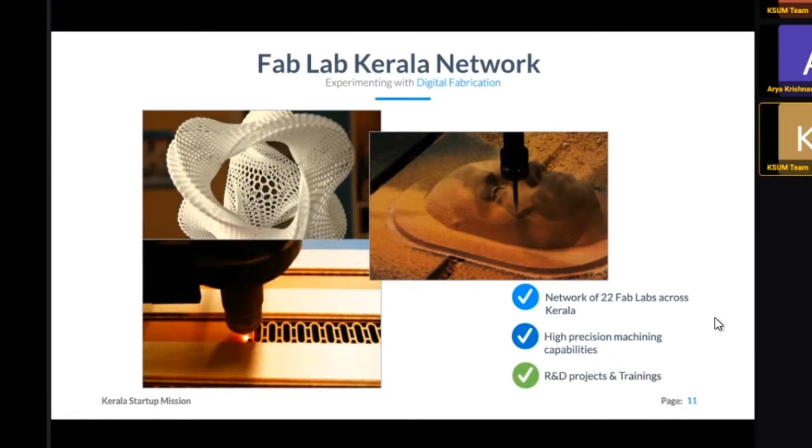Then we have a program called Future Technologies Lab. This is one of our initiatives where we are experimenting with emerging technologies. Nowadays the future technologies are like AR and VR, augmented reality and virtual reality. In this COVID scenario, we are introducing this virtual reality tool, showing a 360-degree video of the integrated startup complex and how it's working. Then there's ML, machine learning, and AI. For all future-related things, we are supporting those who are into the future technology area.

We are giving technology support and mentoring for startups. Mentoring is one of the key areas any startup needs. So we are creating a holistic AR VR ecosystem in Kerala.

In ISC we have different centers of excellence. Unity Technologies is one of the world's largest game developing companies. In association with Unity, we are conducting a different accelerator program as part of the Future Technologies Lab. Basically, we are giving access to cutting-edge gadgets, software, different AR or VR software, and different machines for testing related to startups, along with training and mentoring programs from industry experts, mostly from Unity and other industries such as TCS Innovation Lab. We are giving this kind of expert talks and mentoring for these startups.

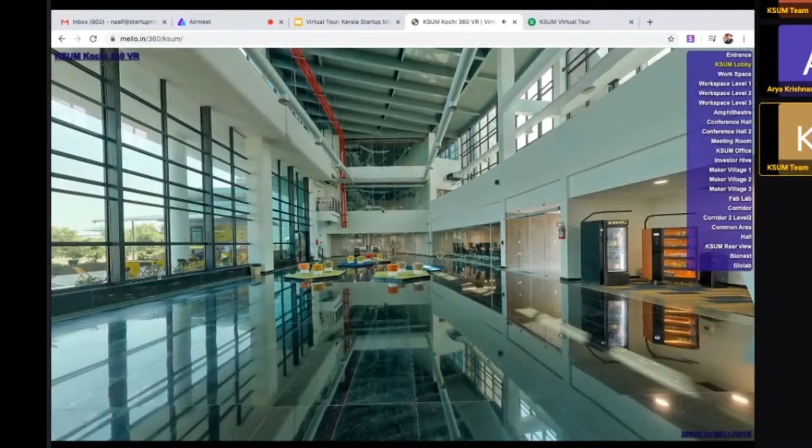You can see I am going to the lobby - so this is the main lobby, you can see the infrastructure and all. I'll go through a quick walkthrough. Once you enter the Integrated Startup Complex, we first enter this main lobby. This main lobby has a reception desk. You can enter if you are coming as a visitor.

These are the different conference rooms and all. So then from the lobby we are entering - there are 8 floors in this building. We are entering the workspace. This is a workspace where our office is located. Then we have different workspaces - our startups are working in this co-working space.

We have a telephone booth and small conference rooms. When startups want to discuss with their team members, they can use this facility. This is the co-working space where our startups work - the plug and play office space. They can use 24-hour internet facility - everything includes internet, electricity, housekeeping, security, every facility.

This is workspace level 1, this is workspace level 2. We have different sectors like closed space, open space, co-working space. This is the closed space - one of our companies called Riafy Technologies is operating in this closed space.

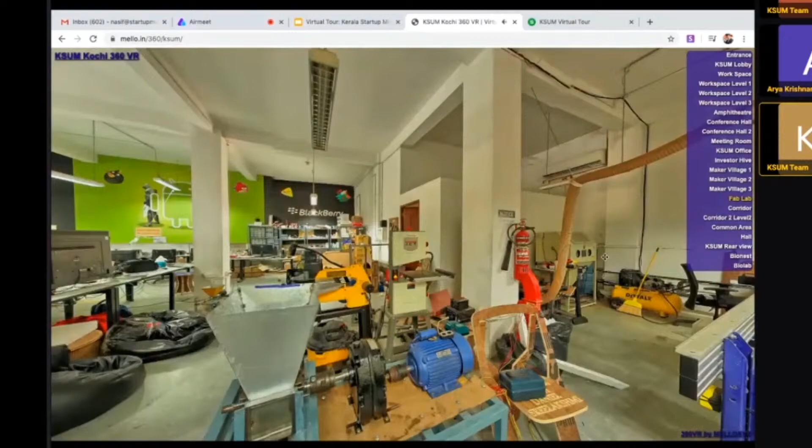This is Fab Lab, an old Fab Lab. Right now we launched the Super Fab Lab facility. Basically, Fab Lab is the digital fabrication lab for creating prototypes. This is one of the oldest CNC prototype machines. This video we shot 3-4 months back.

3 months back, we launched the Super Fab Lab facility in ISC. You can see the advanced machines, zoomed in. This is some of the oldest machines.

These are the furnitures we created from the Super Fab Lab facility. You can see the Super Fab Lab facility once you are coming. I'll add that to this video next time.

Then we have the corridor. This is like our freelancers' corner. Even freelancers can come and work here. We have a premium co-working space.

These are the facilities where people have one-to-one meetings. And in this corridor, this is the corridor level 2.

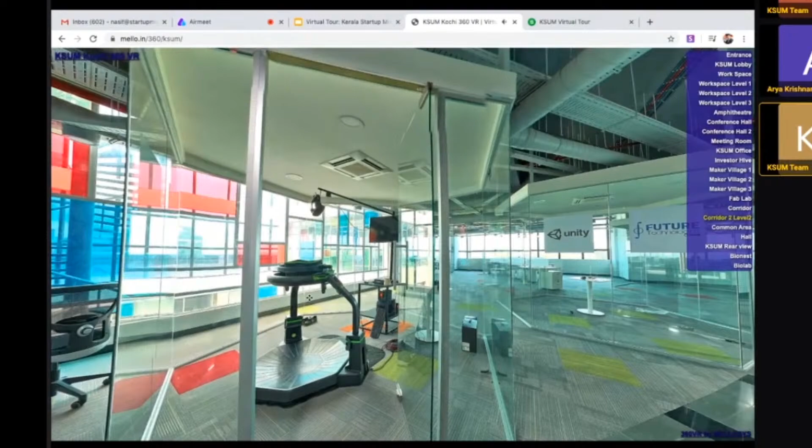We have a future technologies lab, like Unity, everything - startups into AR VR can use this facility, they can avail the space and all. This space is for a scale of startups. This is a closed space.

Then we have a common area. Even this is like a Copa Cafe model, you know, in Silicon Valley, like small cafes. When startups, founders, and investors want to discuss something new, this is what we built for discussing startup related things. People are working here.

Then we have a different hall. We are creating a live-work-play model. Startups can play table tennis and different indoor games in this hub after they're finishing their work.

Goes to the lobby, and this is the rear view. You came to the front, and this is the rear view of this building. There is a cafeteria here, then a food court in the basement floor.

This is the rear view of the integrated startup complex. You can see the greenery there, fully located in a greenery area next to the Kalamassery Medical College, Kochi. This is the main view of this building.

And we have one more incubator also going to launch, called BRIC, India's first cancer incubator. It's going to launch in the next 1 or 2 months. That also is located in this integrated startup complex.

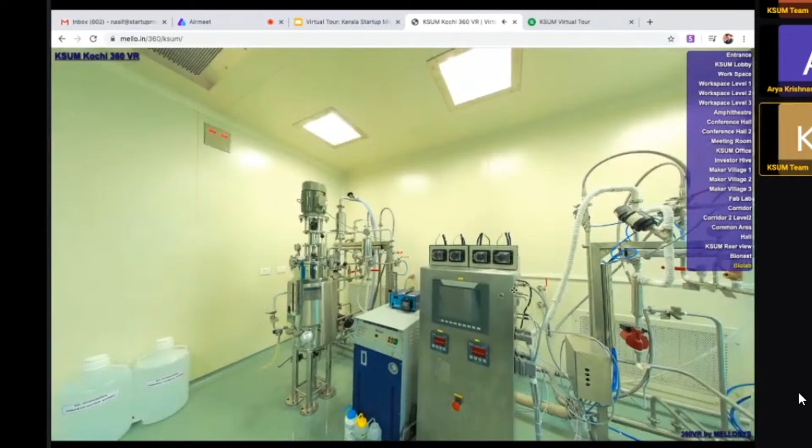This is the fully... you can see there are different bio labs in Bionest, fermentation labs, testing facilities. These are the advanced machines for scientific medtech. This kind of lab is in different rooms. I just got the one image.

Okay, this is all about it.

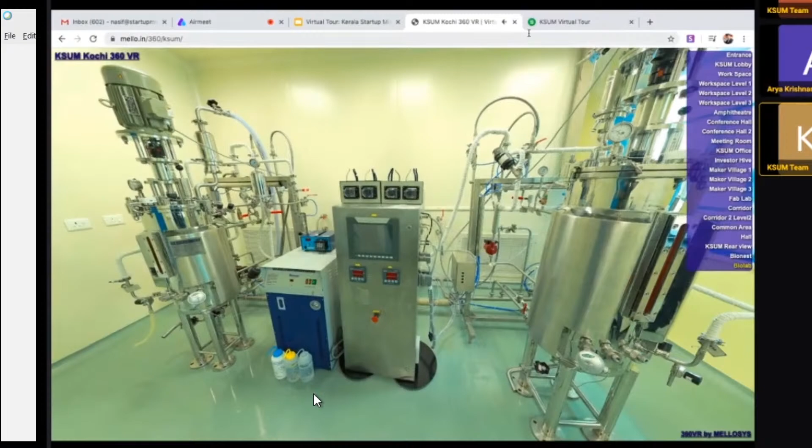Sir? Sir, are you here? Yes, can you hear me? Yes, it's audible. Sir, can you share your screen? Yes. It's good.

Although we can start, right? Yes, after... yes, the conclusion, right? Yeah, right, okay, after the conclusion. And a small info about, sir. Yes.

Niveda, you can conclude. Okay.

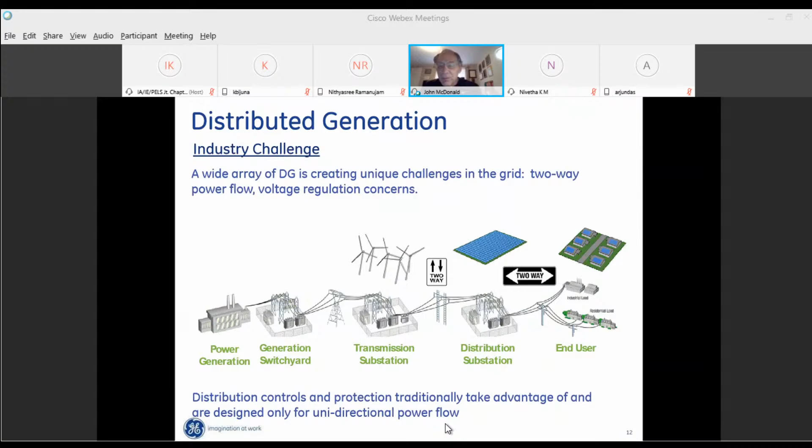The distribution part of the grid, when we initially designed it, we assumed electricity would only flow in one direction, from the source down to the load, okay? But when we integrate distributed generation into the distribution part of the grid, it causes electricity to flow in two directions: from the distributed generator upstream, and from the source to the load. So it gives us a lot of challenges, two-way electricity flow, which we didn't initially design for, and some other issues we'll talk about, okay? Now we can integrate distributed generation into the transmission part of the grid, the distribution part of the grid, or at the customer's home, by putting photovoltaic panels on the rooftop. What we'll talk about now is the distribution part of the grid and the end user.

Some of the challenges we face are open circuit over voltage due to unintentional islanding. A microgrid could be operating connected to the grid, but if something happens to the main grid, we want the microgrid to continue to operate, so it may island itself, disconnect itself from the main grid. If it's unintentional, if we didn't plan for it and it islands itself, we may have an open circuit over voltage condition. Also, protection ratings of the protective relays may not match fault currents, because now we have a component to the fault from the distributed generation. The problem too is that fault currents due to distributed generation vary. The sun doesn't shine the same all the time and the wind doesn't blow the same, so there's intermittency with renewable generation, which causes the output to vary, right? So a lot of challenges.

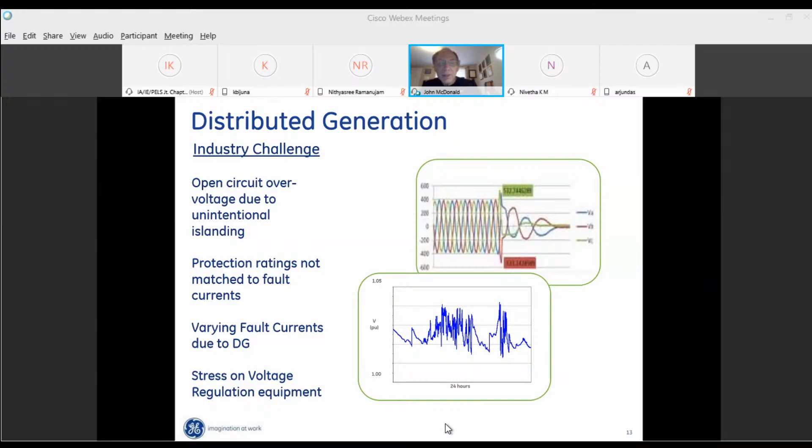So we wanted to minimize the diesel generation and maximize the use of these distributed resources. So we added logic to a microprocessor-based relay to make that a microgrid controller. The objective was to satisfy the load continuously and to minimize the use of diesel while maximizing the use of distributed generation, okay?

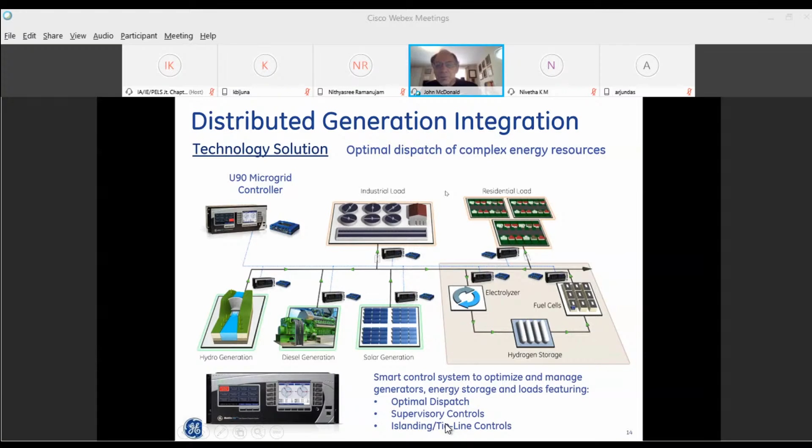Now, one of the challenges with distributed generation is the intermittency, right? The load needs to be satisfied all the time. How do we satisfy the load when the sun isn't shining on the photovoltaic panels? Well, we can use batteries, right? Energy storage, that's instantaneous. Or we can use what we call fast start, fast responding thermal generation.

Typically this generation uses natural gas as its fuel because it's lower cost and has lower emissions. So we have new technology today, which is fast start, fast responding natural gas turbine generators. And then we have pre-packaging of, say, lithium ion batteries to help with instantaneous needs or system frequency to deal with the intermittency. So we have new technology solutions today, both with energy storage and with natural gas-fired turbine generation to help meet the intermittency of the renewables.

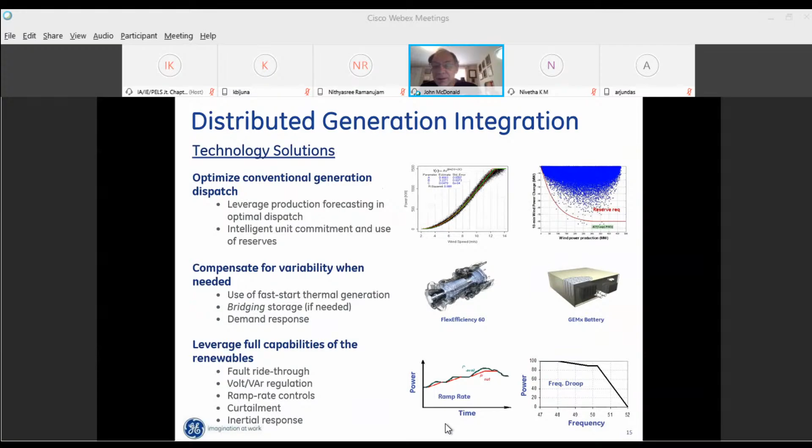Now, this is a special article I wrote in 2013, almost 7 years ago, in Power Electronics magazine, about new applications of power electronics. These new applications were driven by the impact of the high penetration of rooftop solar photovoltaic panels on the distribution system. I used a specific example from a utility in California, San Diego Gas and Electric. They had one distribution feeder where over 35% of the homes have rooftop solar panels. That's a very high penetration.

What happens is in the morning, these homes were on the Pacific Ocean, and there was a marine layer of fog caused by the humidity of the ocean that blocked the sun from seeing the photovoltaic panels on the roof of the homes. When that fog burned off later in the morning, all of a sudden all of these homes began generating electricity instantaneously. The voltage on the feeder spiked. It had a step function increase and then spiked and then oscillated. Sometimes the clouds would be between the sun and the rooftop solar panels.

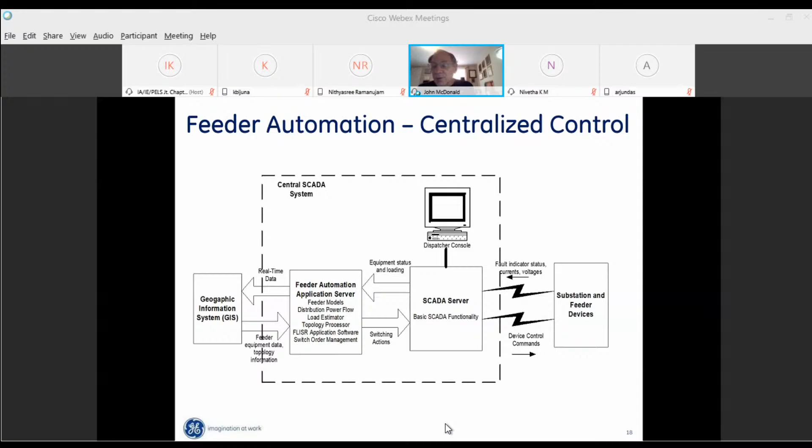We can distribute the intelligence of some of these applications down into the substation level, which is what I showed with those light blue boxes at the substation level. There are a lot of different special applications on the ADMS. These are the applications that operators in the control center use continuously in real time, doing very special optimization of the different parts of the grid.

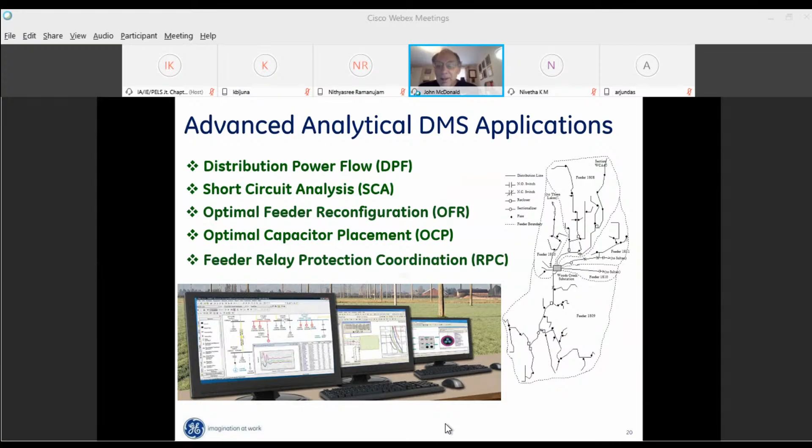This is another set of applications that run on the ADMS, but these are more used for analysis - on demand rather than continuous use - special analytical tools. Then we have another set of applications based on the utility, additional applications a particular utility wants to run on the ADMS. It's quite complex, but it does a lot of optimization of the distribution part of the grid. With any utility today, the trend is to go from doing things manually to being a fully digitally enabled grid - we call that the digitized grid.

That's the utility's goal, to be a digitized grid. But you can't go from where you are today to being fully digitally enabled in one step - it's typically too much effort and too much money. So what we do is help a utility put together a roadmap, a strategy. Let's say you're starting with manual control and legacy methods, and add special equipment called circuit reclosers.

Let's add special intelligence with trouble call and advanced metering infrastructure - smart meters and two-way communications - and a SCADA system with remote control and monitoring. That has a big benefit: it lowers what we call customer minutes interrupted, lowering outages by 28%.

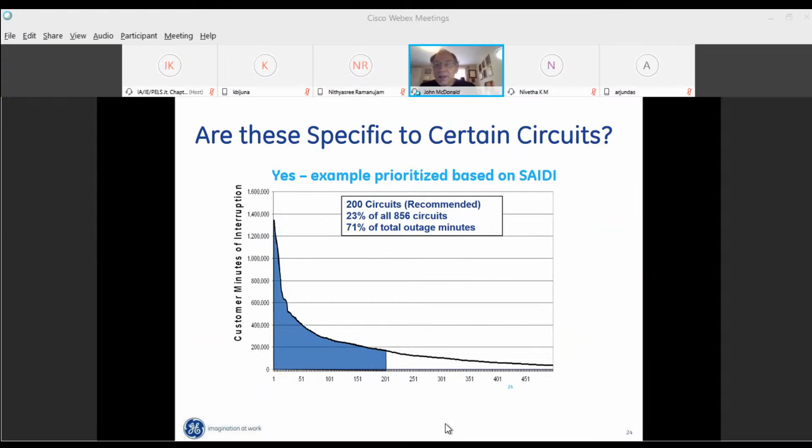So by doing a deeper study, we can do a better job of getting more benefits from the money we spend. Now, when we install equipment in the field, whether it's industry applications, power electronics, or whatever, we want to make sure we're extracting the data that has value from that equipment and making sure the right people at the customer get that data so they can provide the most benefit to their organization. In a microprocessor-based device, there's really two types of data.

There's operational data and non-operational data. The operational data is the information we send to the control center, and it's what the operators use to monitor and control the power system. Very important information, and it's a time series of information. What is the voltage now? What is it in 2 seconds, in 4 seconds, in 6 seconds? So every 2 or 4 seconds we're sampling this information and sending it upstream. It's a time series of information called operational data.

But with the introduction in the 1980s of microprocessor-based devices, suppliers include a different type of data called non-operational data. This is both points and files. It could be a digitized waveform, or a sequence of events report, which is a file of information. We don't need this continuously, we just need it on demand. And the operators in a control center typically don't need it, that's why we call it non-operational data, but other groups in the utility need it.

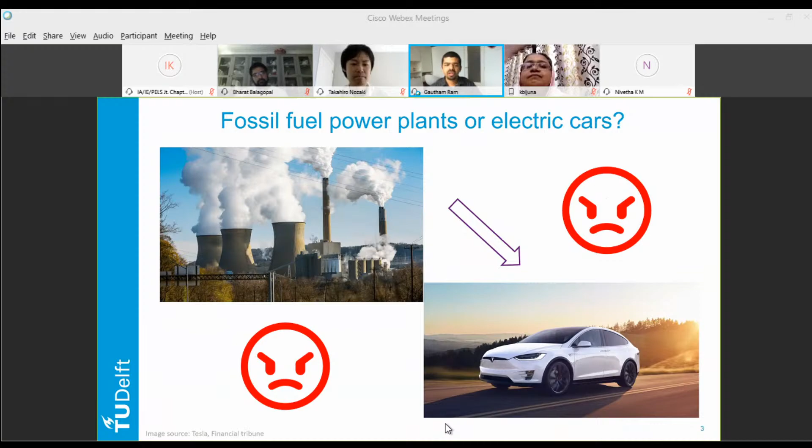But the reality today is that it is these fossil fuel power plants, powered mostly by gas and coal, which are actually producing our electricity. And using that electricity, we are now charging our electric vehicles. So as much as electric cars themselves have no emissions of carbon dioxide and other harmful gases, the electricity production continues to have these emissions. So what I would like to see in the future, which I think a lot of people around the world and the younger generation want to see, is a future where you can use renewable sources of energy like solar and wind to produce our electricity, and then use that electricity to charge our electric cars.

This means that electric cars are not yet as sustainable as they can be as we go into the future. If you're in Sweden, there's hardly any emissions. But if you're in Estonia, India, or Poland, you have a significant amount of emissions.

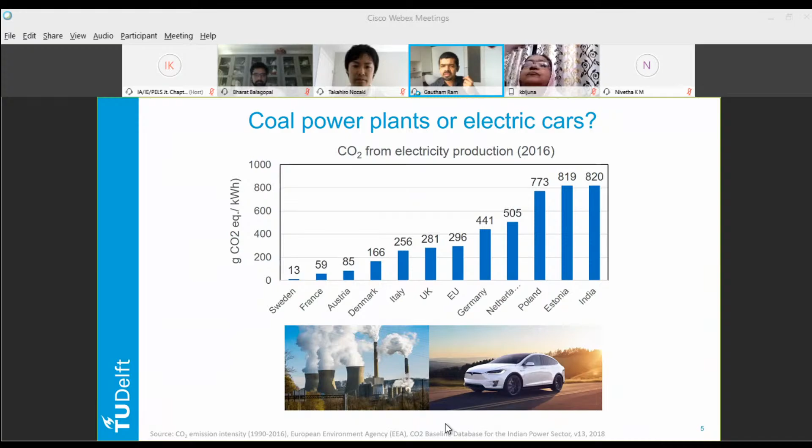This is when you look at the whole greenhouse gas emissions from well to wheel - from taking out the oil or coal, refining it or producing the electricity, to driving it for 1 kilometer. So the key message is electric cars must be the future, but we should use a sustainable source of electricity for producing our electricity. This means the technology we worked on for this innovation was to use solar energy for doing this.

So what can you do now? Let's say you want to use solar energy for charging an electric car. You can buy a solar inverter and a standard electric vehicle charger, and use this to take energy from the solar, transform it using an inverter from DC to AC, and then use an AC electric vehicle charger to charge your car.

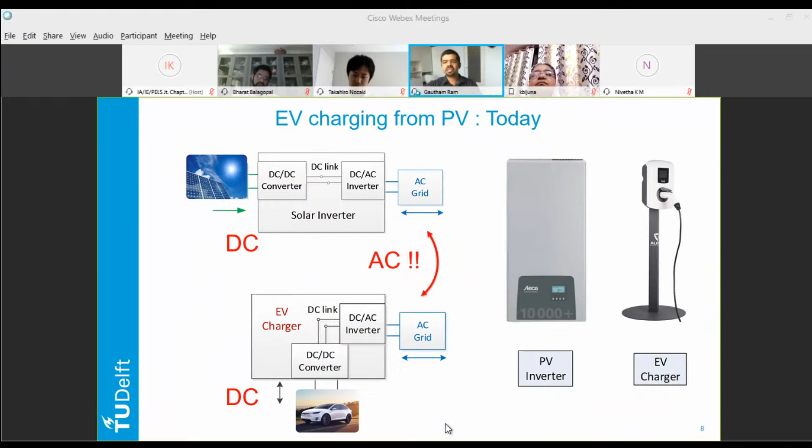You need this inverter. So what we focused on was what we call an integrated DC solution. Here you use one charger which works fully on DC, which takes energy on DC from the solar panels, and then uses that energy on DC to charge the electric car. And if you don't have enough solar energy, you can then take energy from the grid for charging the electric car.

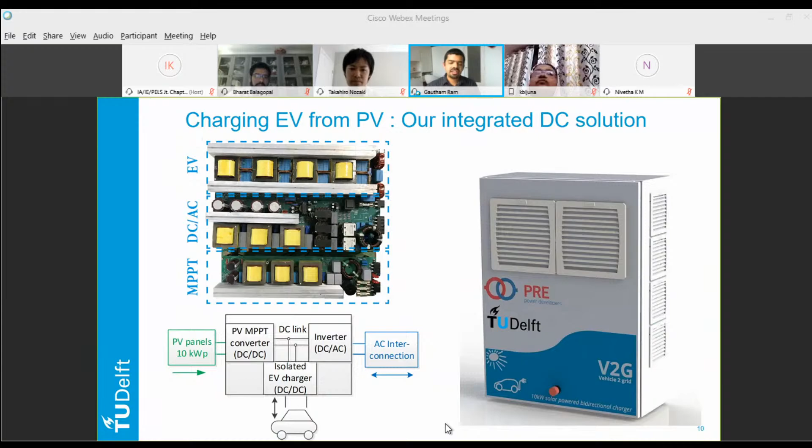So why is this solution considered new and state of the art? That's because you have this DC integration of solar and electric vehicle, which means much higher efficiency. We only need one inverter for both the solar and the electric car for exchanging energy with the grid. And if you make this charger bidirectional, you can use the electric car also as storage for solar energy, so you can store extra solar energy into the electric car, and when you need that energy, you can send it back from the electric car to the grid.

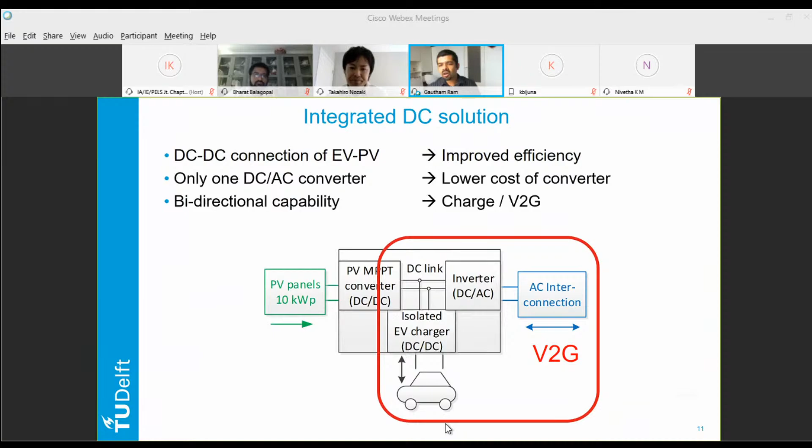Also, the way we designed the system is that you can do 4 operations using this charger. One, you can take the energy from the solar panels and put it into the electric car.

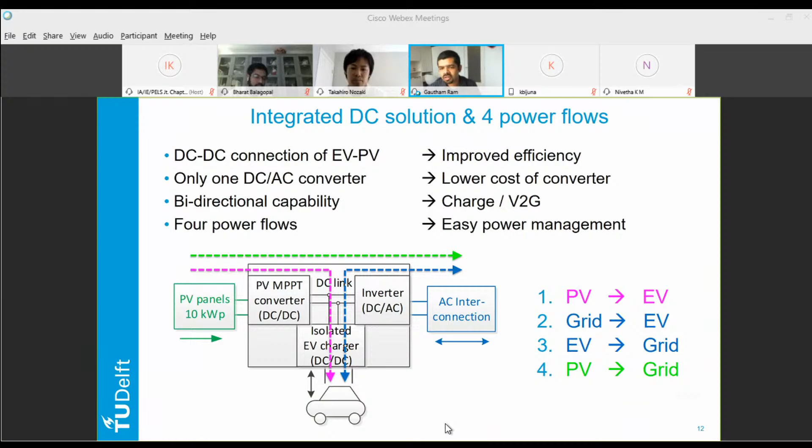What you can also do is, if there is no solar energy, you can take energy from the electricity grid and charge the car, or send energy from the car back to the grid. And in case there is no electric car, you can take the energy from the solar panel and send it to the grid, just like what a normal solar inverter does.

Also, we focus in this project on using wide bandgap semiconductor devices based on silicon carbide. This means you can have much higher switching frequencies in your system. And we also used powdered alloy core inductors.

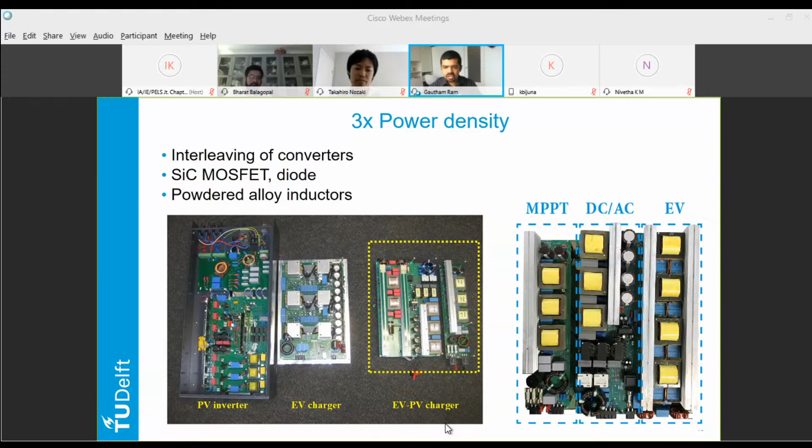Especially when you charge from solar, you don't always have the full solar energy. You often have partial powers, so you get much higher energy efficiency at partial powers. This system is also compatible with CHAdeMO and Combo, the two global standards for electric vehicle charging. So we also developed intelligent charging algorithms.

I think in the previous talk, John was talking about how we should do smart charging, looking at the grid situation, the congestion in the grid, and energy prices, to intelligently decide how to charge. We also developed such algorithms within this project.

As we move forward from 2020 to 2030, it's expected that this market of using the car battery as a potential for grid support will dramatically increase. This means you can use the electric car battery for things like frequency regulation, for energy trading based on prices, and for congestion management in the grid.

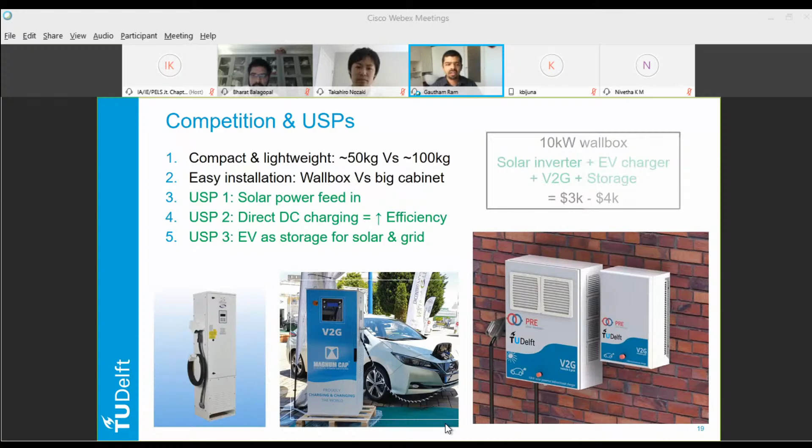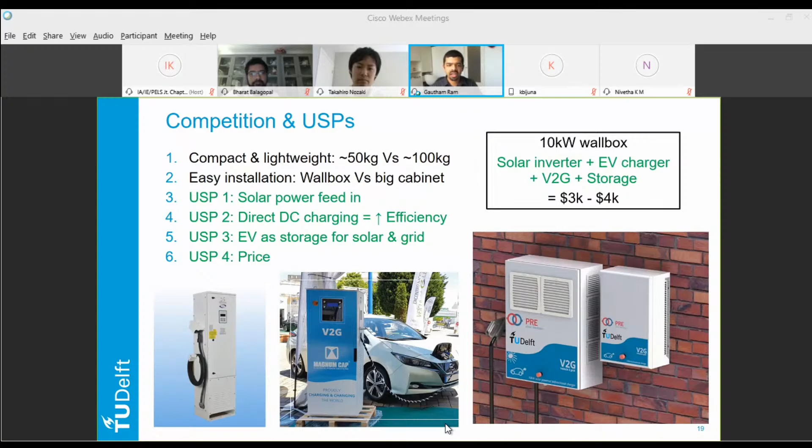You can use it with solar or without solar, and it operates on DC, which means high efficiency, and it can use the car battery as storage - you don't need an extra battery. From a price perspective, it's like buying a solar inverter and a car charger, but everything combined into one, making it much more cost-effective than buying these systems separately.

We got a lot of awards for this project. One was the most significant innovation in vehicles award, the best tech idea of 2018 award from the magazine Type. And when we applied to the under-35 competition, we were fortunate to be one of the finalists, together with the other people presenting in this panel.

Thank you very much. If you have any questions, I'll be happy to take them later on.

Thank you very much, Gautham. We would like to hear more from Takahiro Nozaki. Dr. Takahiro Nozaki, please. Dr. Ram was talking about V2G and EV. Now, Dr. Nozaki will be talking to us from brain to hand.

Let me share my screen. Can you see my screen? Yes, it is coming. Okay, we can see your screen. Okay, then let me start my presentation.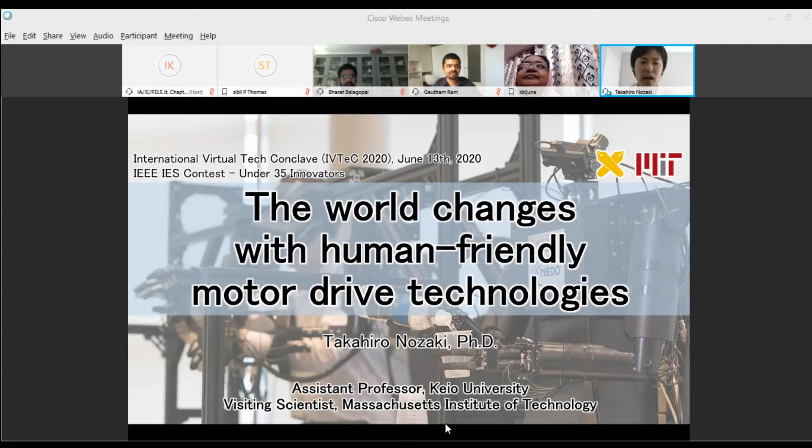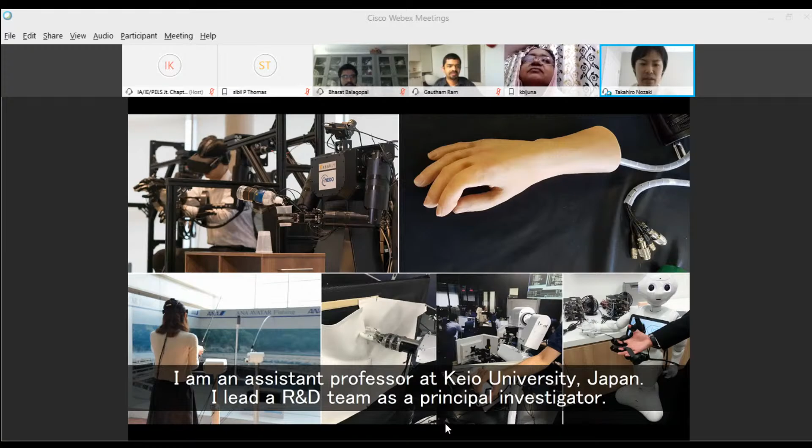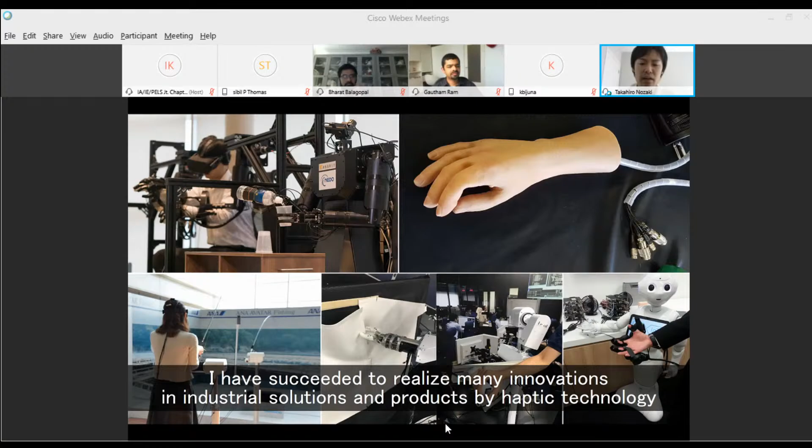Hello everyone, it's my great pleasure to talk to you in this wonderful conference. My name is Takahiro Nozaki, and I'm an assistant professor at Keio University, Japan, where I lead a research and development team as a principal investigator. I have succeeded in realizing many innovations in industrial solutions and products using haptic technology. Today I will show you the results and introduce some future possibilities.

Maybe you do not notice that all of you adjust applied force using your sense of touch in daily life. Without the sense of touch, you would easily break the target object, since you cannot recognize whether your finger is touching the object or not. Therefore, a sense of touch, or tactile information, is very important and necessary, especially in contact motion. In contrast to conventional clumsy and dangerous robots, we can provide the market with a dexterous and flexible system.

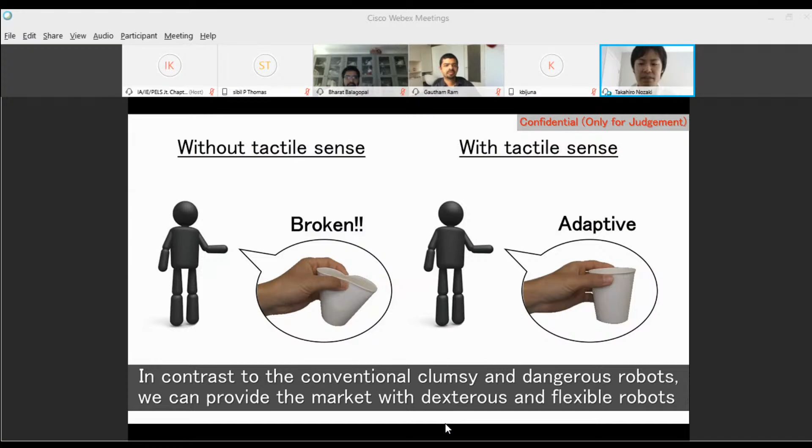We call our haptic technology real haptics. This technology was originally developed in 2002 by Professor Kohei Ohnishi at Keio University.

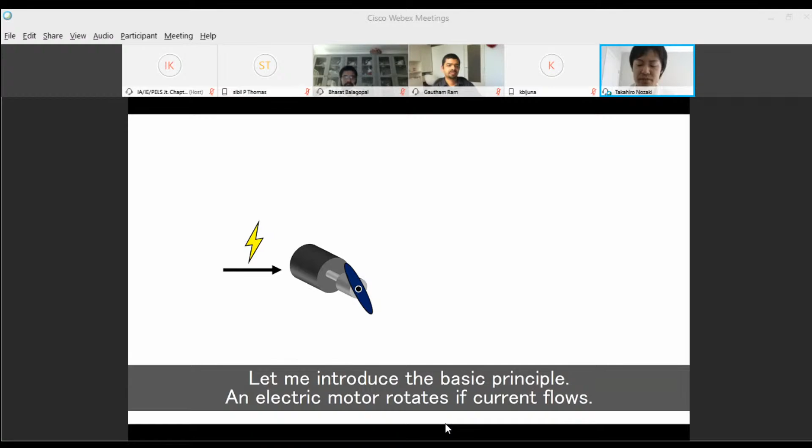Let me introduce the basic principle of our technology. All of you know an electric motor rotates if current flows. When the motor makes contact with an object, load force is applied to the motor. By estimating the applied load force, we can obtain force information without using conventional force sensors. Conventional force sensors have a lot of drawbacks in robustness, cost, size, and bandwidth. This technology enables transmission, storage, and reproduction of tactile or haptic information by utilizing the estimated load force applied to the motor.

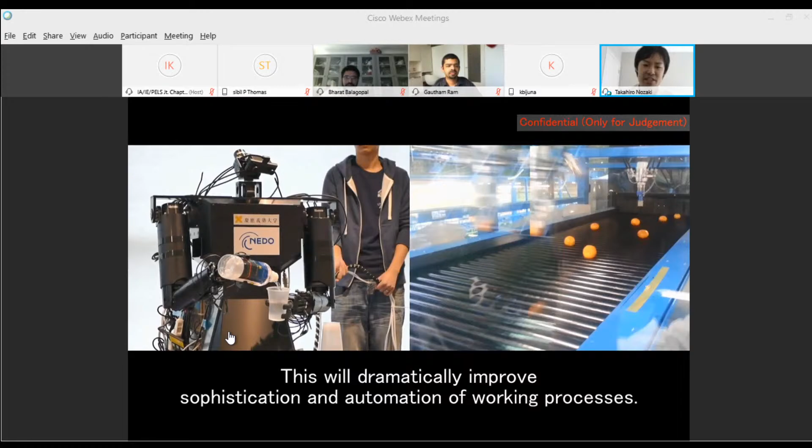This will dramatically improve sophistication and automation of working processes. Let me introduce some of the examples.

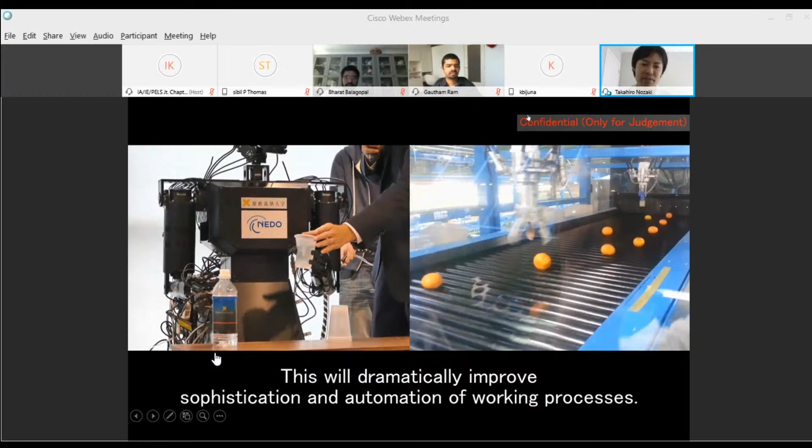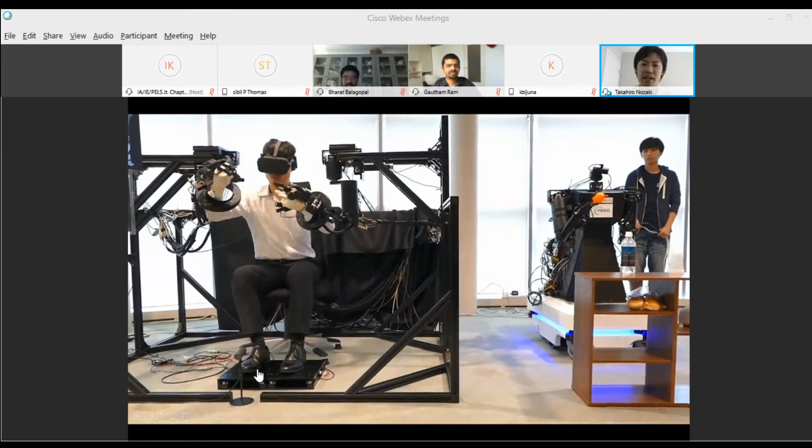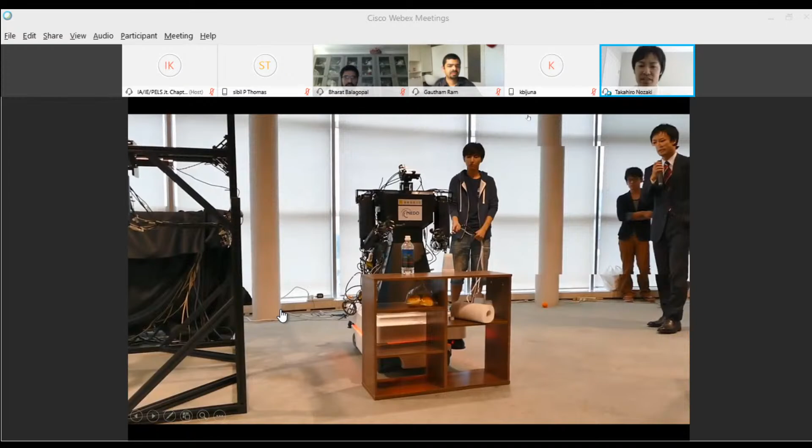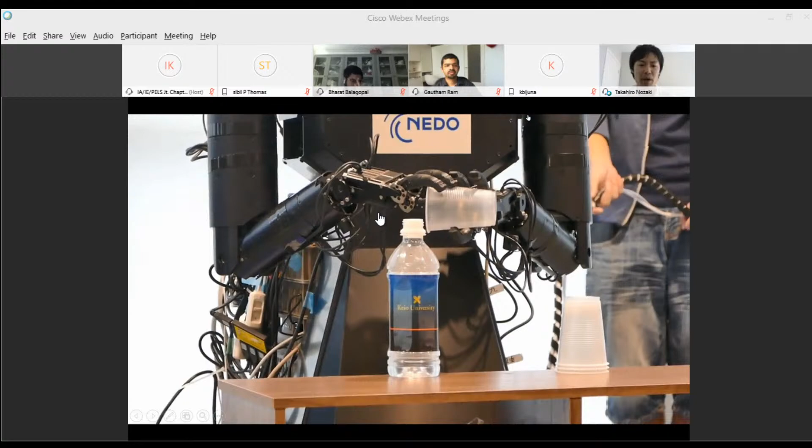The first one is the dual-arm teleoperation system. This system can transmit visual, auditory, and haptic senses. The image the operator is watching is exactly the same as the image the robot is watching, and the sound is also transmitted from the robot side to the operator side. The operator can feel the actual stiffness of the target object through the robot, so the robot can hold the cup with adequate force so as not to crush it and also not to drop it. With this robot, dangerous work in extreme environments can be performed safely from a remote location.

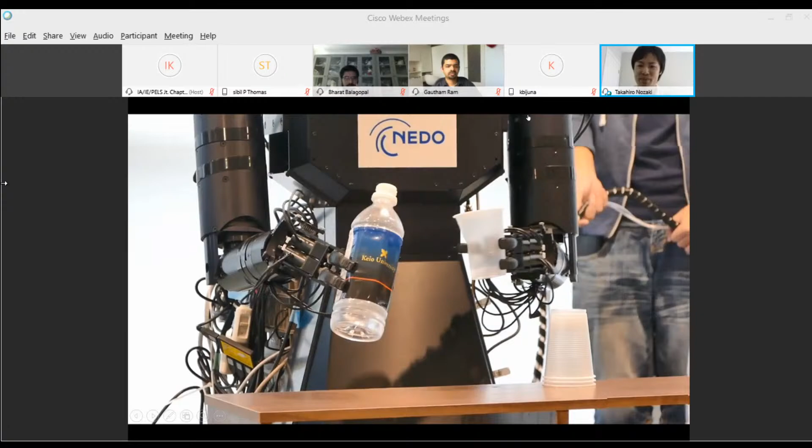As you can see, maybe this video is a little bit choppy, but you can see this robot can realize this kind of dexterous manipulation.

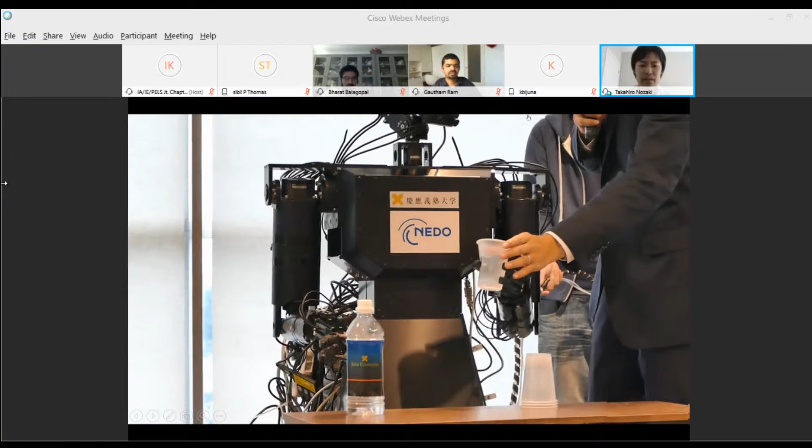The second example is a prosthetic hand with haptics. She doesn't have her own right arm, but in this picture she is using our prosthetic hand, and the sense of touch detected by the prosthetic hand is transmitted to a device mounted on her big toe.

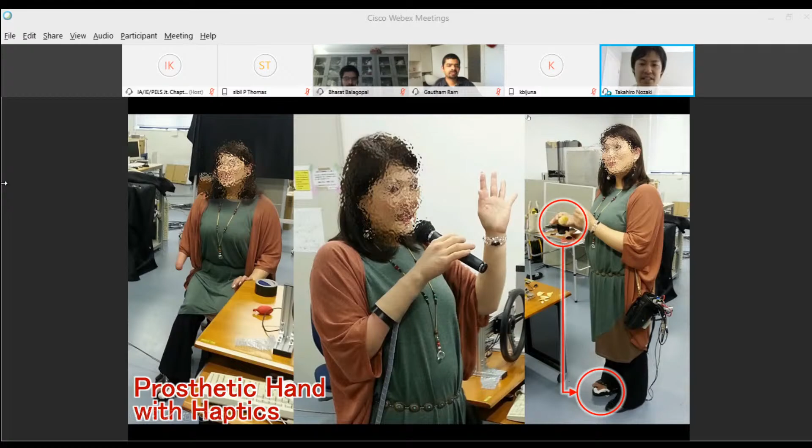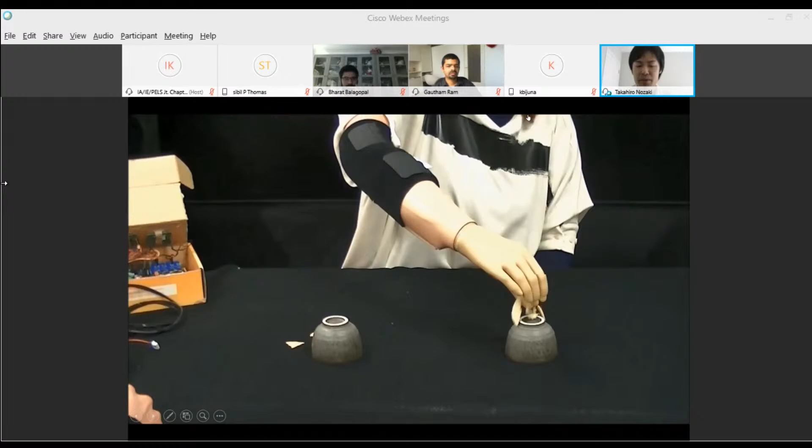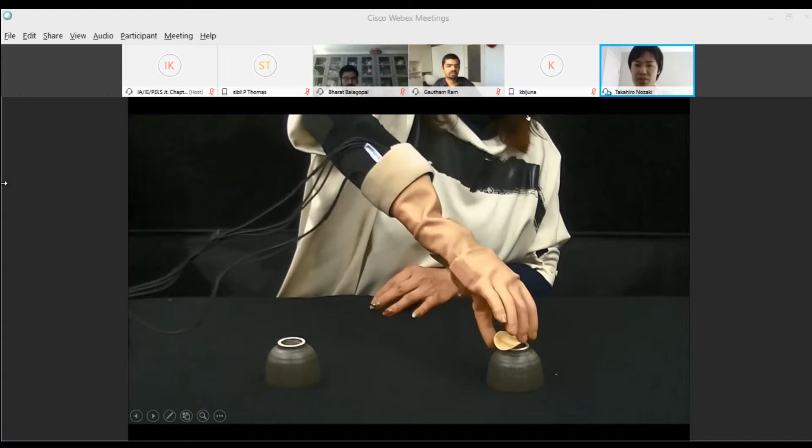This is the experimental movie, using the conventional myoelectric hand. She couldn't manipulate the potato chip because she couldn't feel how much force is applied. But by using our haptic prosthetic hand, she succeeded in manipulating the fragile potato chip because she could adjust the grasping force.

This is another video from another view. By feeding the applied force through the device mounted on the big toe, she could realize this kind of dexterous manipulation.

Next example is avatar fishing. This enables fishing from a downtown area. The user can feel the actual force caused by the fish, and the operator can see the seaside area. We conducted an actual verification experiment and caught fish in Oita while being in Tokyo. Oita prefecture is far from Tokyo, about 1,000 kilometers away.

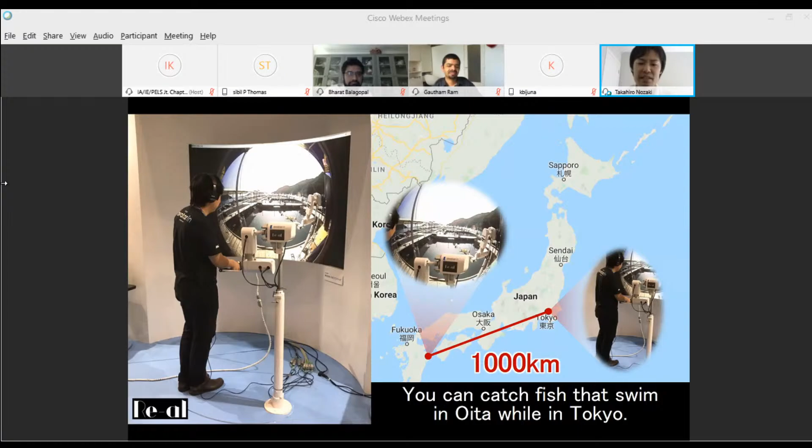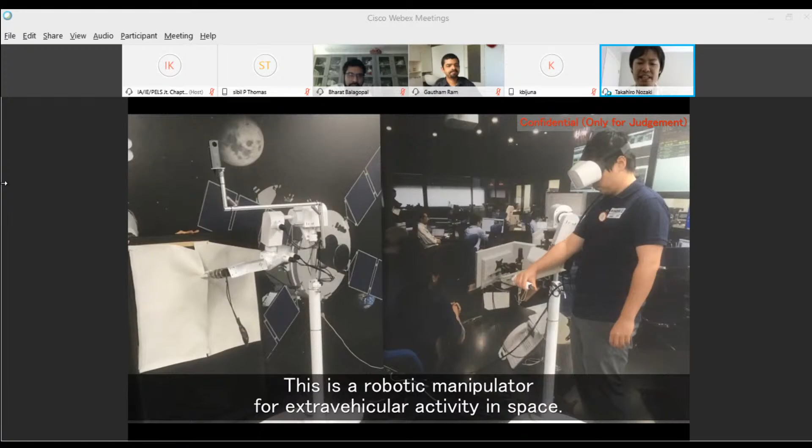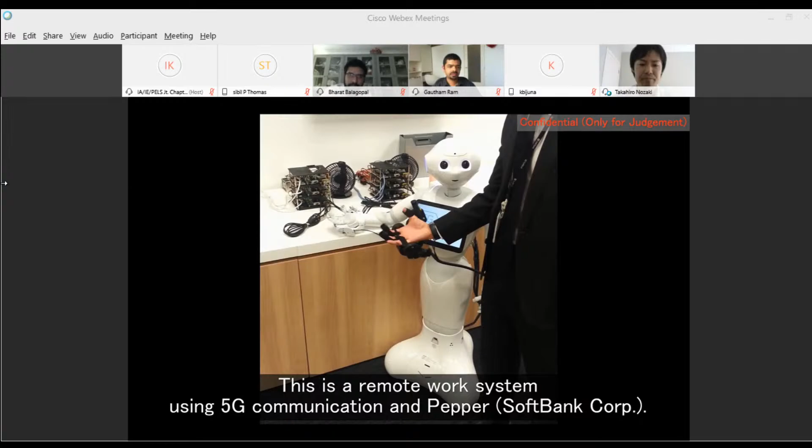This example is the application for a hydraulic-driven excavator. The operator uses a glove-type master system, and the excavator tracks the position of the glove. Grasping force is also transmitted from the excavator back to the operator. We mounted this system onto an actual excavator and succeeded in realizing dexterous manipulation, manipulating fragile material.

This is a real-time viscometer utilizing our haptics technology. From the estimated force information and velocity information, we can estimate the physical characteristics of the liquid.

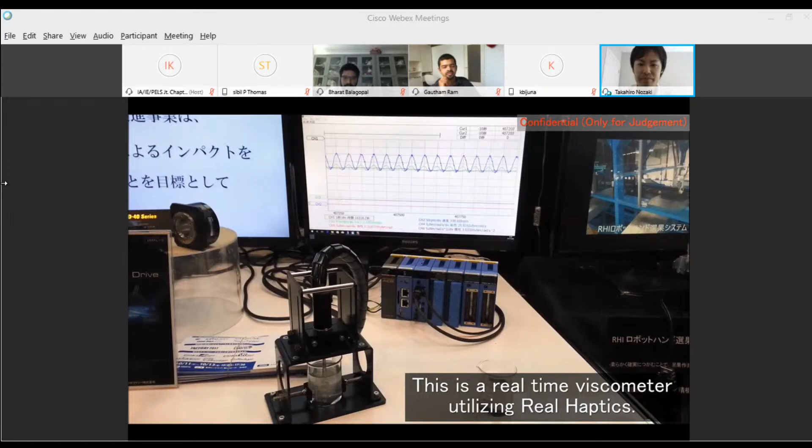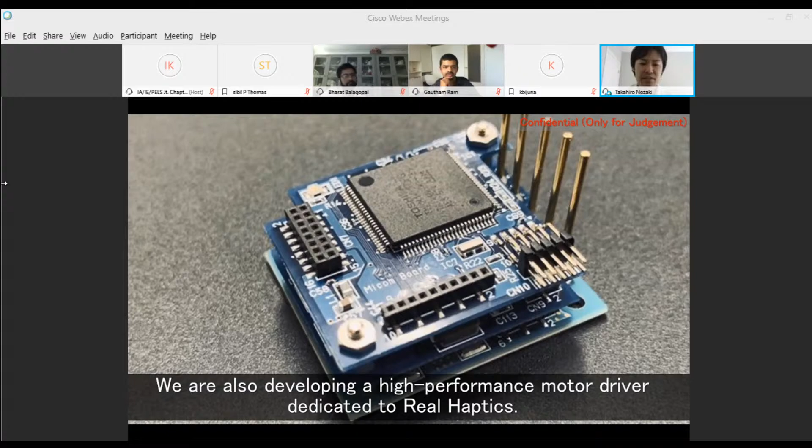We are also developing a high-performance motor drive system dedicated to real haptics, and an automatic sorting system.

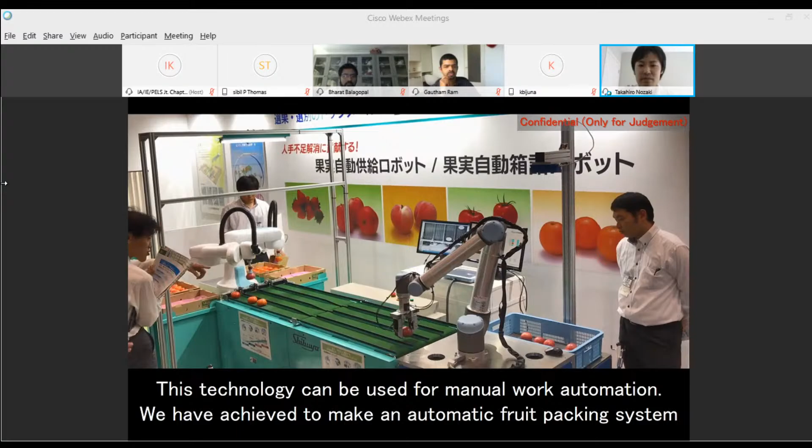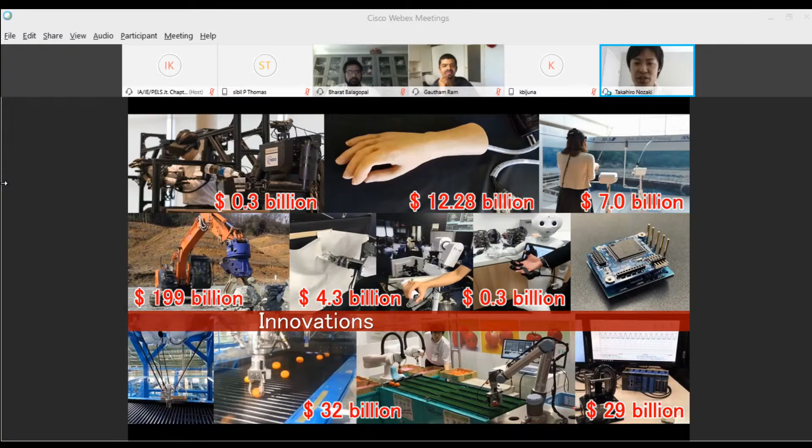So today I introduced some of the innovations I realized. I won't dive into the details, but these are the market sizes of each application, and the total market size is really huge. I believe the world will change with human-friendly motor drive technology. These are the references and ideas. That's all, thank you for your kind attention.

Thank you, Dr. Nozaki. This was very interesting research to see. Maybe most of the participants here would be interested in knowing more about it. Right now, I would like to hear more from Dr. Bharat Balagopal. I think he is going to talk more on storage rather than putting it to the grid. Welcome, Dr. Bharat.

Hi everybody, and hi Gautham and Takahiro. It's nice to connect with y'all again, it's been a while. So let me jump right in and share my screen. You should be able to see it right now. Yes, sir, it's visible.

Good morning, good afternoon, good evening for people in different time zones. I am Bharat Balagopal, and I am going to talk about smart battery gauge for continuous battery condition assessment. A brief introduction of myself: I am a postdoctoral research associate working with Dr. Mo-Yuen Chow at North Carolina State University at Raleigh, North Carolina.

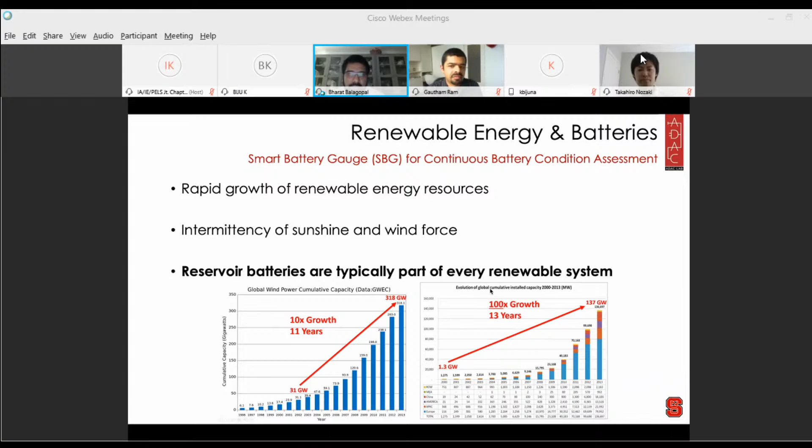So the renewable energy market as of 2015, that's 5 years ago, and it's increased a lot more since then, is at 31.5 million units, about $60 billion, and is expected to grow to 51.5 million units, or more than $100 billion by 2025. So for every battery unit, we can install one smart battery gauge. That tells you how much scope there is for this particular market. And there is so much need for batteries, so there will always be a need for a proper monitoring device. That's why the smart battery gauge is a very important product.

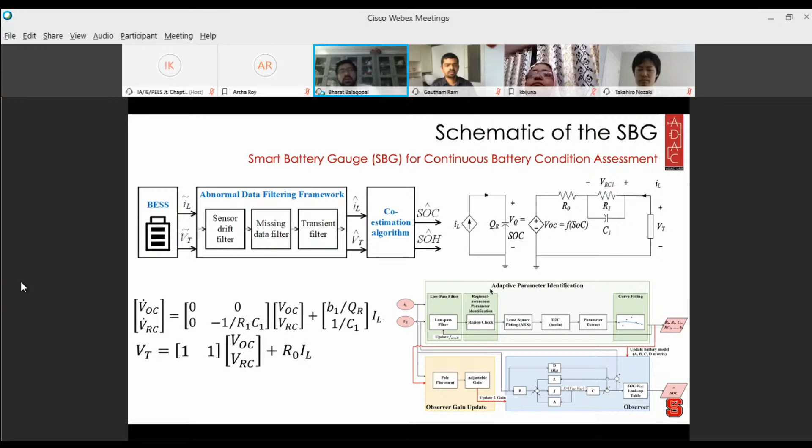And then we have another observer that we use from the open circuit voltage of the battery to calculate the capacity of the battery. So we've implemented our smart battery gauge in two real-world facilities.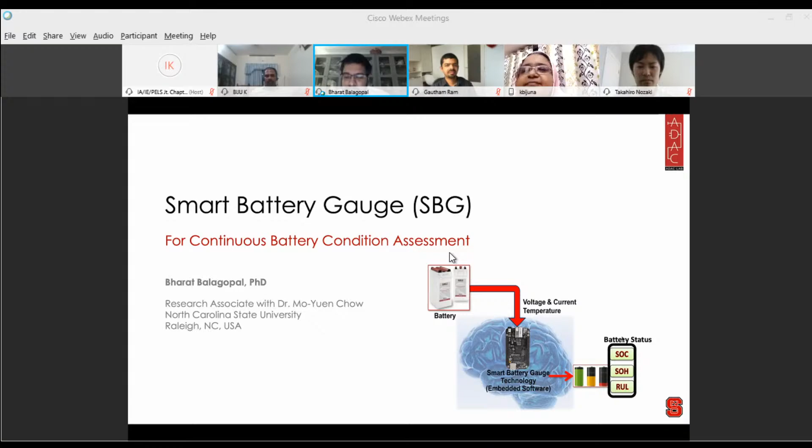Now I want you to tell these participants what has driven you to this contest. Some of them may think that only innovations resulting from a doctoral thesis or postdoctoral thesis can be put in for the innovators contest. Is that so? I want each of you to give a short description of what drove you to this innovators contest, and what preparations our participants should take for it.